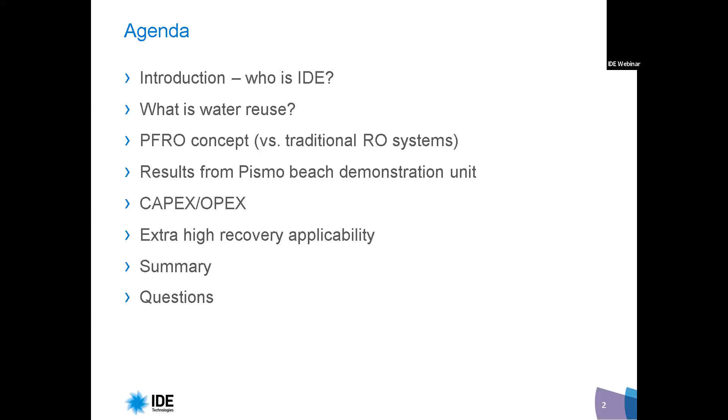So what's on the agenda? We'll start with a quick introduction about who is IDE, what is water reuse. We'll show the PFRO concept versus traditional RO systems. I'll share some results from the Pismo Beach demonstration unit, show some analysis of CapEx and OpEx, go quickly over the applicability of extra high recovery using PFRO, end up with a summary, and of course, we'll leave some time for questions.

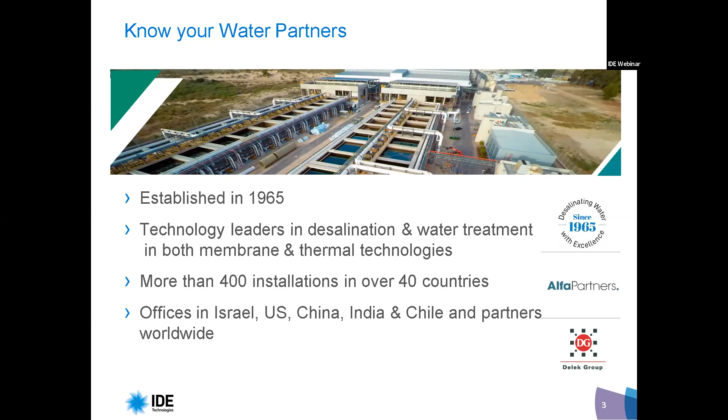A brief introduction about IDE, for those of you who are not familiar with us. IDE was established in 1965, more than 50 years ago. It's a technology leader in desalination and water treatment. Started with thermal technology, and as RO membrane technology started to get into the market, switched more to membrane-based technology. More than 400 installations worldwide, offices in Israel, US, China, India, and Chile, as well as partners worldwide.

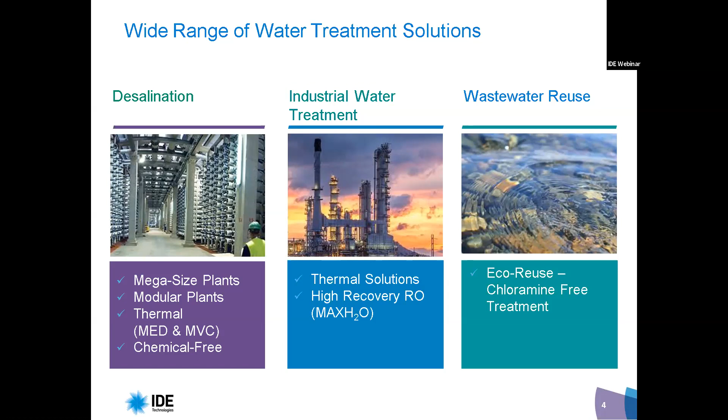IDE is focused on three main sectors: desalination, seawater and brackish, industrial water treatment, and wastewater reuse. It's worth mentioning that in the desalination sector, IDE built some of the biggest desalination plants in the world, including Sorek in Israel, Carlsbad in California, Jamnagar for Reliance in India, and Tianjin in China, which is the biggest thermal desalination plant in China, and many more.

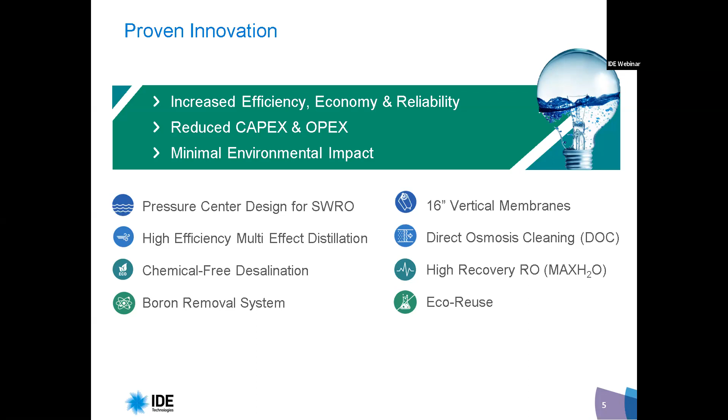IDE has a long tradition of innovation and puts a lot of emphasis on advancing the technology, as you will also see in this webinar about the PFRO technology. Some of the key innovations developed at IDE, among others, are pressure center design for seawater RO, 16-inch vertical pressure vessels like installed in Sorek, direct osmosis cleaning, and chemical-free desalination, also known as ProGreen, and many more.

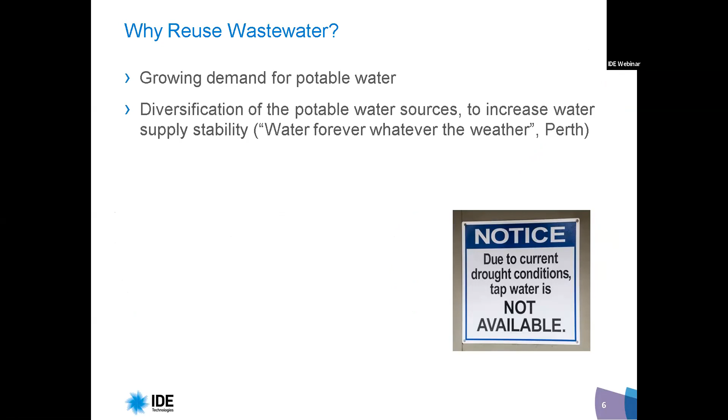I'll go quickly over a short description of the need, since I'm sure most of you already know about it. So why reuse wastewater? There is a growing demand for potable water. Another important feature is the diversification of potable water sources to increase water supply stability. As they say in Australia, in Perth, water forever, whatever the weather. I like that saying.

Since it's a low TDS water source, it enables low pressure RO operation, so it's a cost-effective process — you don't need to go to very high pressures. It's an abundant water source. It's a proven technology with a long reference list, and therefore not something very new, so you can feel quite confident when going to water reuse, and there are strict regulations, so the water is pretty much very, very safe.

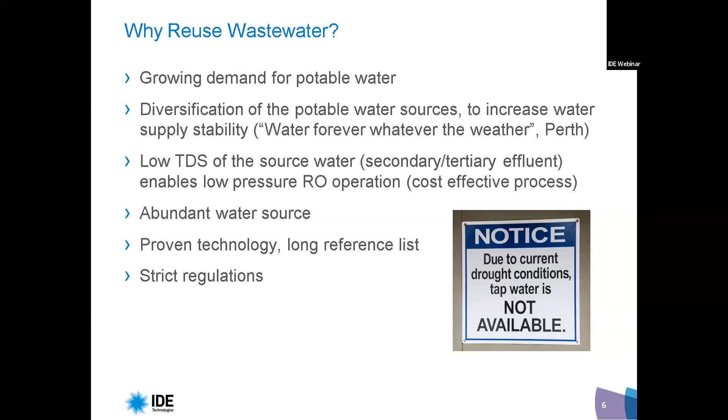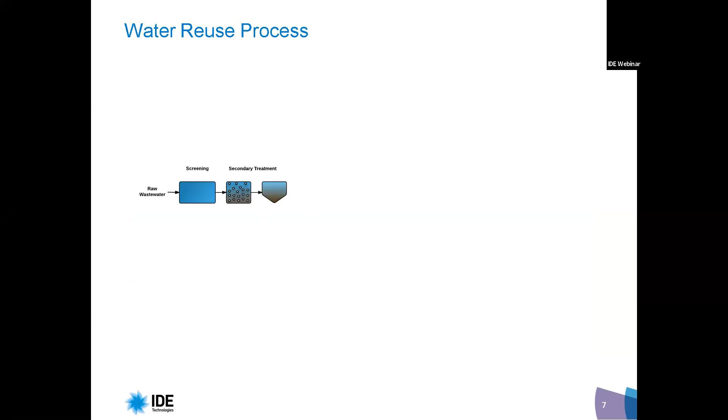So here is the water reuse process. We're starting with a wastewater treatment plant — in this case, an activated sludge process with a secondary effluent. The effluent flows to the advanced water treatment, basically the water reuse facility, typically including at least 3 stages: starting with microfiltration or ultrafiltration to remove suspended solids, then reverse osmosis, which does the actual desalination itself, removing ions as well as dissolved organic contaminants, and finally UV AOP — UV disinfection with advanced oxidation — aimed at taking care of any organic contaminants, residual pharmaceuticals, antibiotics, etc., through this high energy AOP process.

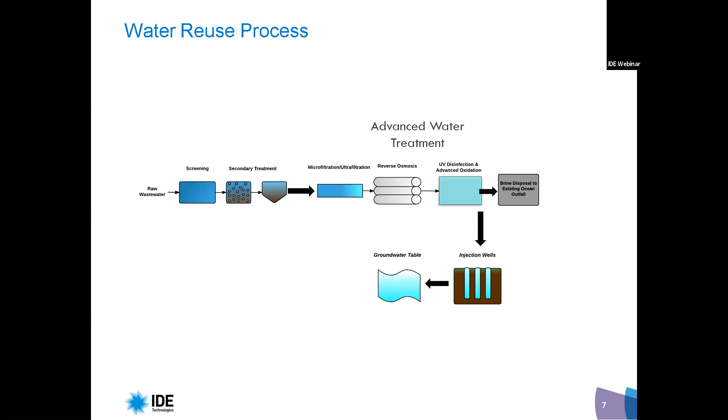The brine is usually disposed either to ocean outfall or whatever other source there is for the brine. And the permeate, if it is indirect potable reuse, which is basically all the cases, goes to either injection wells or other natural body sources. The water then gets mixed with natural water in the environment and ends up in the production wells where it is treated and supplied to the community. So this is the advanced water treatment, the water reuse facility.

Typically, chloramine is dosed to the UF and sometimes also to the RO to control biofouling. However, the usage of chloramine has some disadvantages. First, it creates disinfection byproducts. When hypochlorite is injected into the wastewater treatment plant's effluent to form chloramine, it also reacts with organic matter in the water and forms certain organic contaminants such as NDMA, haloacetic acids, and trihalomethane. All of these disinfection byproducts pose health risks and are not desirable, even though they're mostly degraded in the UV-AOP process, but still better off without them.

Chloramine dosage has to be managed well, because if it is overdosed or there is not enough ammonia in the water, it may form free chlorine, which may oxidize the membrane surface and damage it. So it adds complexity to the system. Another issue is that chloramine lowers the UVT value of the RO permeate and acts as a free radical scavenger, therefore reducing the efficiency of the UV-AOP process — I will talk about it later on. And of course, it also costs money, so it adds to operational expenses.

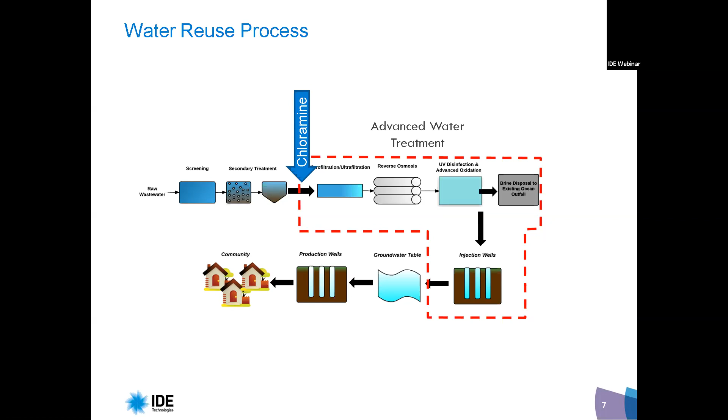One of the key disinfection byproducts is NDMA, a dangerous organic contaminant and suspected carcinogen. In California, it is limited to 10 nanograms per liter, as well as in other places. Our approach to avoid NDMA formation is to avoid chloramine dosage by controlling biofouling and using innovative preventive maintenance methods to keep the membrane surface clean. In other words, just avoid chloramine and keep the membrane clean using alternative methods.

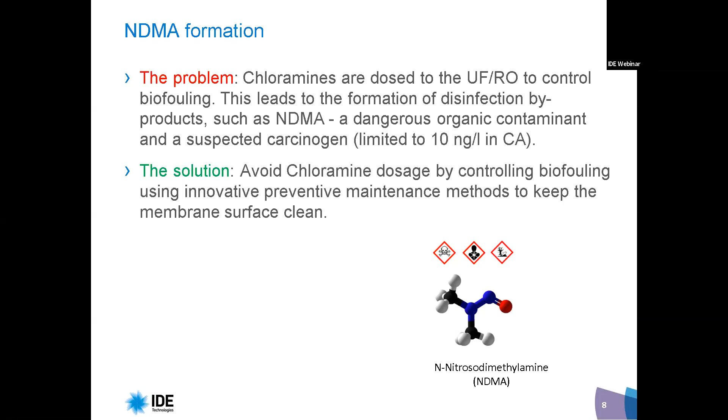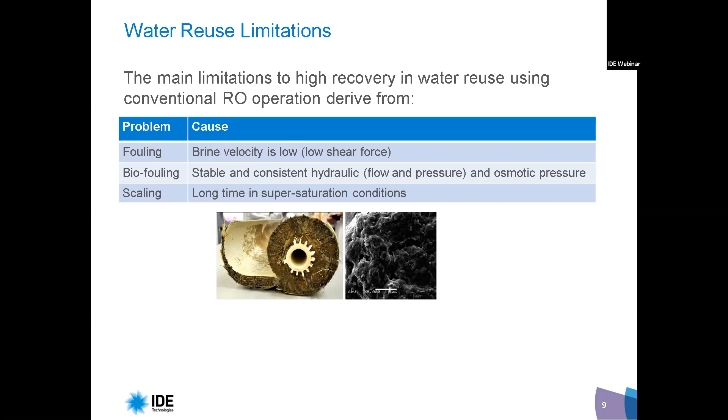The typical limitations to water reuse in general, especially if you want higher recovery, is fouling. It normally occurs because there is not enough brine velocity, resulting in low shear force applied on the membrane surface. Biofouling is always a concern in water reuse facilities, normally caused by stable and consistent hydraulic and osmotic conditions. Last is scaling, and the best conditions for scaling are operating for a long time in supersaturated, hydraulically stable conditions, which is pretty much what happens in standard RO facilities.

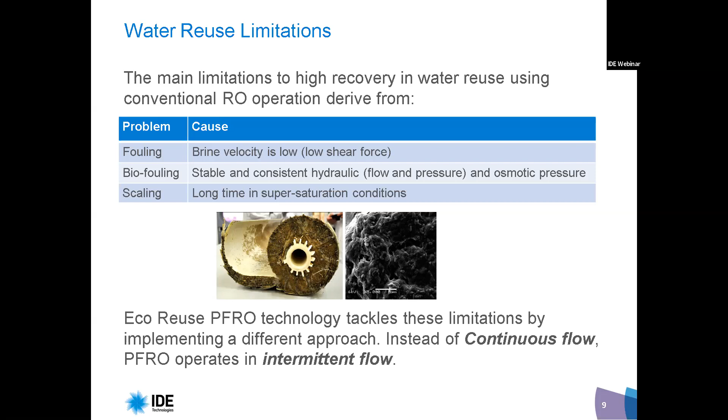The Eco-reuse PFRO technology tackles these limitations by implementing a different approach. Instead of having continuous flow, PFRO operates in intermittent flow, and I will go deeper into details right now.

A classic standard, also termed fully advanced treatment or FAT, is the standard RO facility, which operates at constant flows. In this case, you see a 3-stage water reuse facility, typically in the ratio of 2 to 1 from stage to stage. The reason to design this way is because you want to maintain a minimum brine flow to have enough shear force in the last membranes.

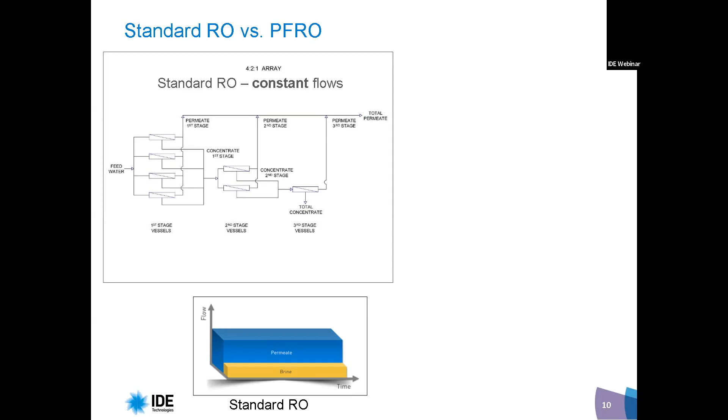In PFRO, there is a different approach: alternating flows. Therefore, there is no longer a need to maintain this ratio of 2 to 1. We can operate at a single stage. What we do in order to maintain enough shear force is operate in an alternating flow regime.

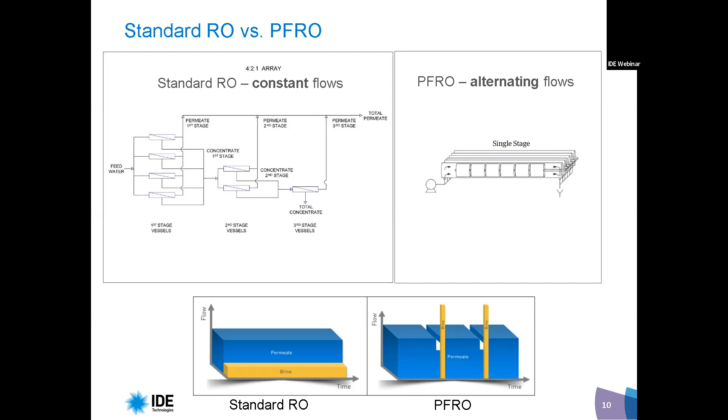Instead of having constant flows like in standard RO, in PFRO there is a brine valve, which you see here. This is the brine valve. It basically dictates the system's status: you can either be in production mode, also called filtration mode, or you can be in flushing mode.

Each bundle of pressure vessels, typically 6 pressure vessels, has a common brine valve that opens and closes. When the valve is closed, we are in production mode. It is dead-end filtration, and 100% of the feed water leaves as permeate. This is what you see right now. So when the brine valve is closed, all the water fed into the system leaves as permeate. As permeate leaves the system, salts accumulate on the feed side, so feed TDS increases and feed flow decreases proportionally.

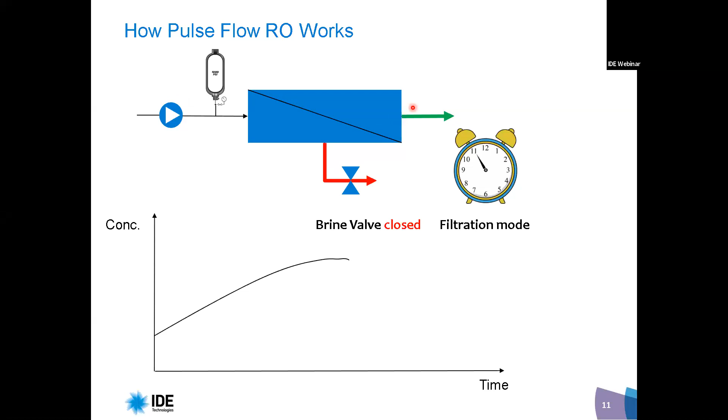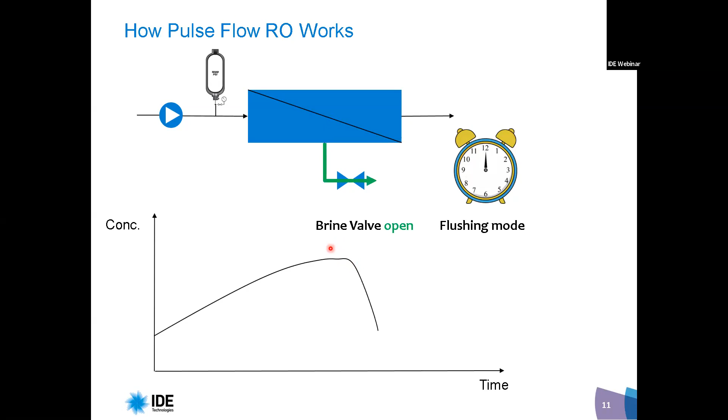Now we change mode and go into flushing mode. The brine valve opens, and the water left inside the pressure vessels, at least in the last few membranes, leaves via the brine pipe very fast, creating a high shear force. The concentration drops down because the high TDS water leaves the system, and new water is fed in the new cycle. When the brine valve opens, the saltiest water in the last few membranes leaves as brine at high velocity, creating high shear force. In the next cycle, fresh water enters the pressure vessels again and the TDS lowers. So there are ever-changing hydraulic and osmotic conditions in the pressure vessels.

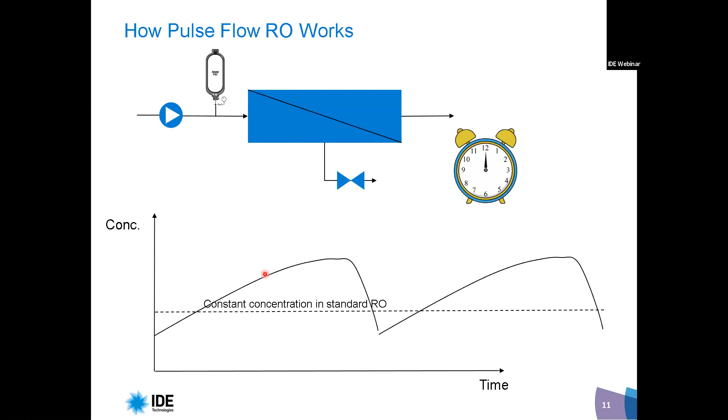What you see here in the graph is the concentration — you see that it fluctuates. Compared to standard RO, where there is constant concentration, in PFRO it always oscillates. Looking at the brine flow, once the brine valve is closed, there is no brine flow, but when it opens, there is a very high peak, reaching very high shear forces — about three to four times or even more than a typical RO.

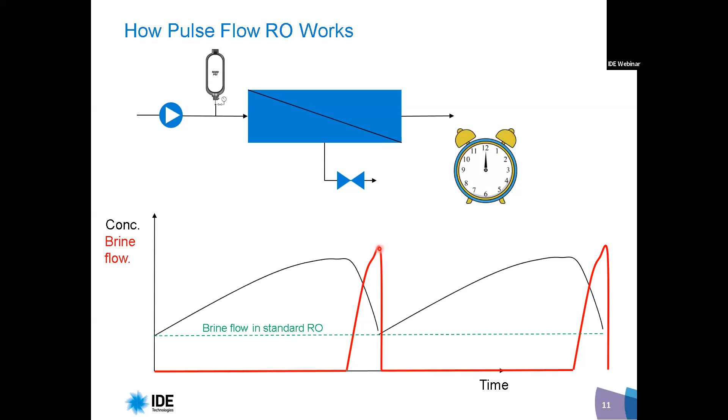So every now and then, there is a high shear force that removes particulate matter or biofouling from the membrane surface, and therefore keeps the membrane clean. Let's look at some real data graphs that show how PFRO works.

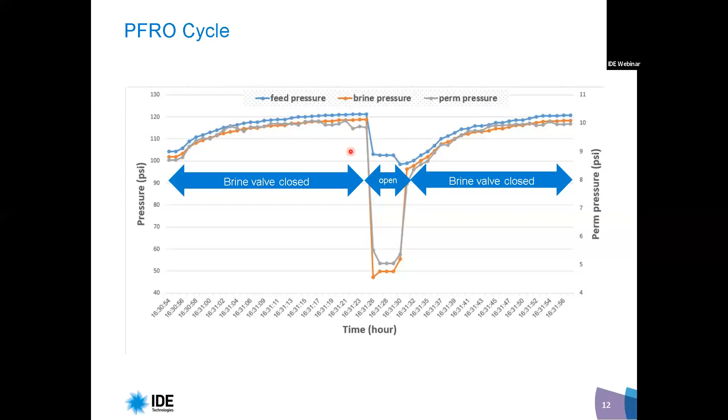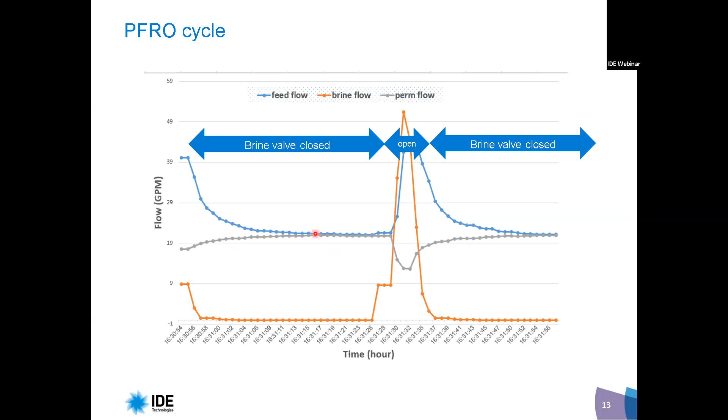Okay, let's go a little bit into the theory of scaling and how it occurs. So in order for a crystal to form, a few things need to happen. First of all, you need to operate long enough for the crystal to form. When a crystal forms, it goes through a stage called the nucleation process.

Usually it happens around some particle that is on the surface. And then after that happens, there is the crystal growth phase, which is usually the longest phase, and it is driven by diffusion. This time is called the induction time - the minimum time required for a crystal to form. Once we are past that induction time, the crystal starts to grow with its three-dimensional matrix.

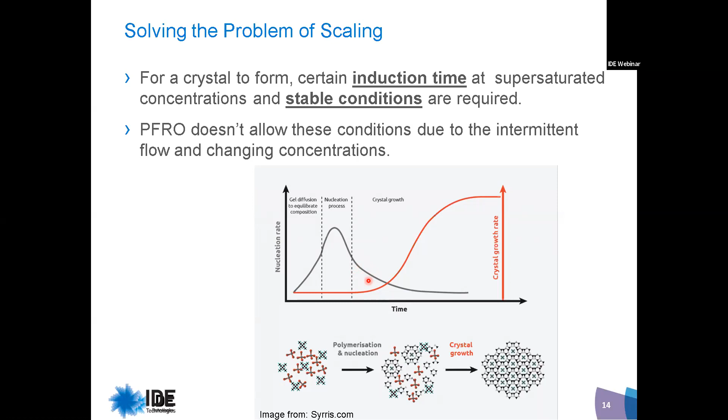And if you don't allow the crystal to get into this - if you don't allow enough time for the induction time to occur - you basically don't allow the crystal to form. This is what PFRO tries to do: it tries not to allow enough induction time for the crystal to form. The other important thing for crystal formation is to have stable conditions, both hydraulic and osmotic. So PFRO doesn't allow these stable conditions, due to the intermittent flow and ever-changing concentrations.

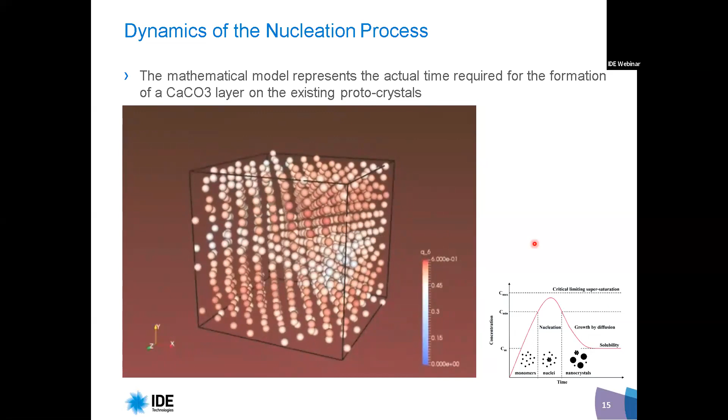Here you see all the atoms try to find the right place - minimal free energy. And there we go - you see that it is all stable now. So basically, if you don't allow this to happen, then you significantly reduce the chances of having scaling.

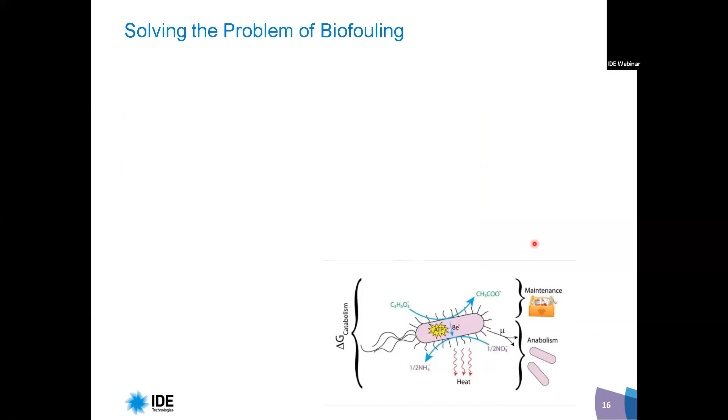So we talked about scaling. Now let's talk about biofouling. For a bacteria to grow and proliferate, what it basically does is gain energy by metabolizing biodegradable organic matter, like the residual organic matter that we have in the effluent.

And the best thing for a bacteria to do is to sit on the membrane surface, open its mouth, and enjoy the flux of nutrients. This is the best thing for bacteria to grow and form biofouling.

However, bacteria need to waste energy if they have to cope with ever-changing hydraulic and osmotic conditions. They need to produce certain metabolites in order to overcome these conditions. Basically, we tire the bacteria out by changing the hydraulic and osmotic conditions - exposing it to high shear force, ever-changing osmotic pressures, and so on. So it's a hard life being a bacteria in a PFRO process, and that's exactly what we want. There is not enough free energy left for the bacteria to multiply and reproduce.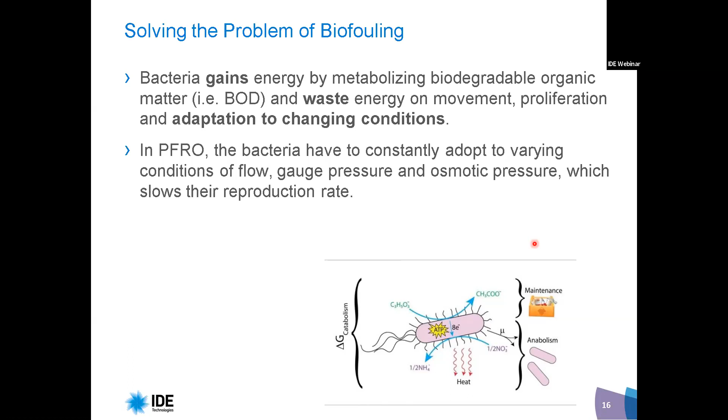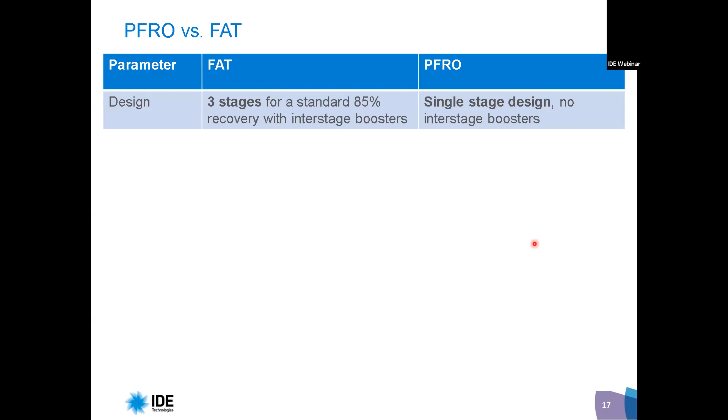So to summarize the differences between PFRO and the fully advanced or classic RO treatment: as for design, in fully advanced treatment design, if you want to reach 85% recovery, normally you need 3 stages using interstage boosters in between. In PFRO, it is a single stage design. There is no interstage boosters, therefore it is a whole lot simpler.

The mode of operation in the fully advanced treatment process is that we operate in fixed and continuous hydraulic and osmotic conditions, whereas in PFRO, there is all the time alternating conditions, both hydraulic and osmotic.

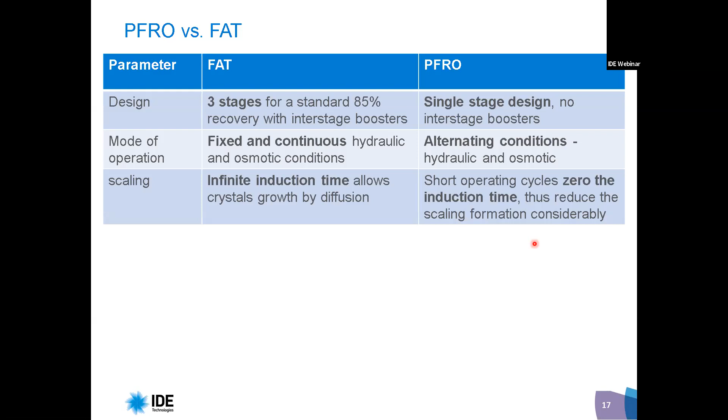For scaling, in fully advanced treatment, there is basically infinite induction time. It allows crystal growth by diffusion. Nothing is there to stop them, only CIPs. Whereas in PFRO, we do short operating cycles to zero the induction time. Therefore, we reduce the scaling formation considerably.

For biofouling, in fully advanced treatment, there is low shear force, stable conditions that allow bacterial proliferation, whereas in PFRO, there is high shear force and also rapid changes in environmental and hydraulic conditions that reduce biofouling.

If you look at the environmental aspects, the use of chloramine to manage or control biofouling creates disinfection byproducts, such as NDMA and others. Whereas in PFRO, we don't use chloramine, so there are no disinfection byproducts. So altogether, it's a safer water being produced.

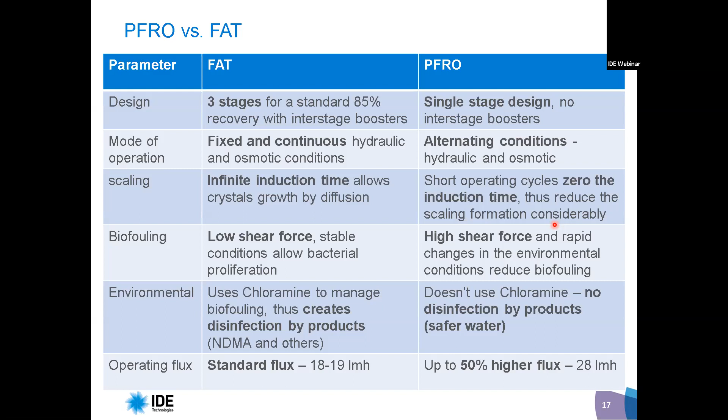Last but not least, a very important parameter for the CAPEX and OPEX is the operating flux. Typically in FAT, we operate at 18 to 19 LMH. If you want to translate that to GFD, it is about 11 GFD, whereas in PFRO, we can do up to 50% higher flux, about 28 LMH, or 16.5 GFD. So significantly higher.

Now let's go a little bit to the results from the actual demonstration facility that we operated at Pismo Beach. Pismo Beach is part of the Central Coast Blue, a regional groundwater augmentation and recycled water project that aims to protect shared groundwater while providing a sustainable local water supply for the 5 cities communities of Arroyo Grande, Pismo Beach, Grover Beach, and Oceano.

The idea behind this project was to increase the groundwater supplies for the area by more than 30%, reduce seawater intrusion, reduce ocean discharge, and increase the region's water supply resiliency. As part of this effort, a water reuse demonstration facility was built to serve as a public outreach facility and demonstrate new technologies, and IDE was lucky enough to be part of this project.

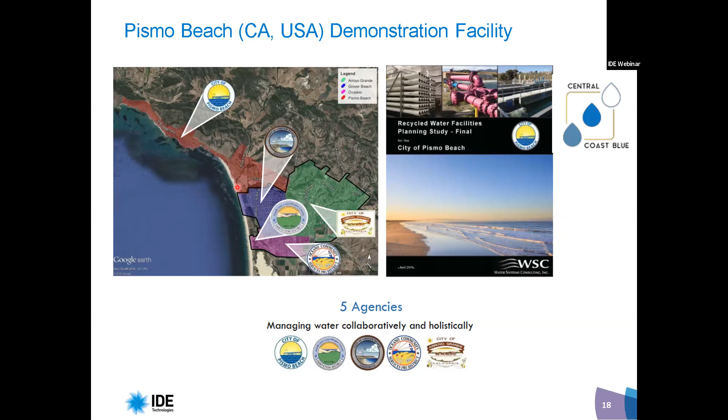So here you see this is Pismo Beach, pretty much in between Los Angeles and San Francisco, a beautiful area.

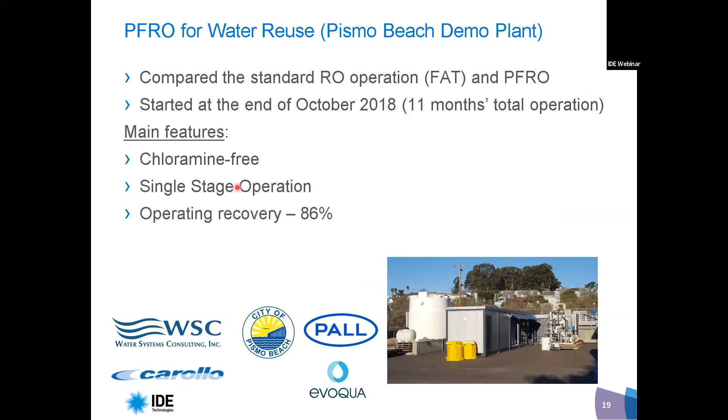So the demonstration facility itself was built in order to compare the standard RO operation and PFRO. It started at the end of October 2018, and operated in PFRO mode for about 11 months. The main features were that it operated chloramine-free in PFRO mode, in single-stage operation versus two-stage operation in FAT mode. Operating recovery was 86%, 50% higher flux than standard during PFRO operation, and no CIP was done throughout the whole time. This is very important.

And as I will show later, there's considerable CAPEX and OPEX savings. I'll take this opportunity to thank our partners: WSC for managing this project, Carollo for collecting data and analysis, the city of Pismo Beach for hosting us and helping on site, Pall for supplying the MF, and Evoqua for supplying the UV AOP.

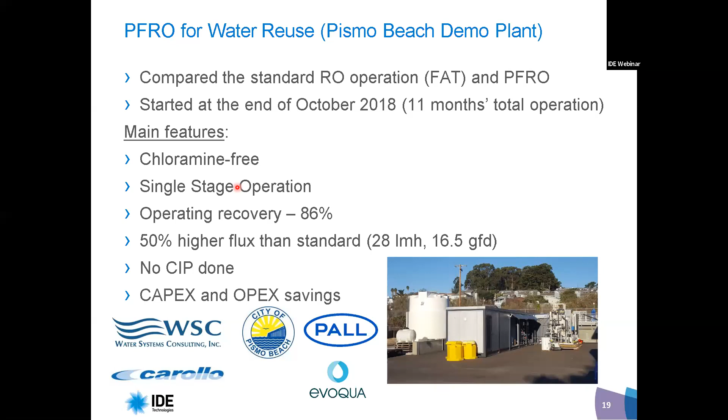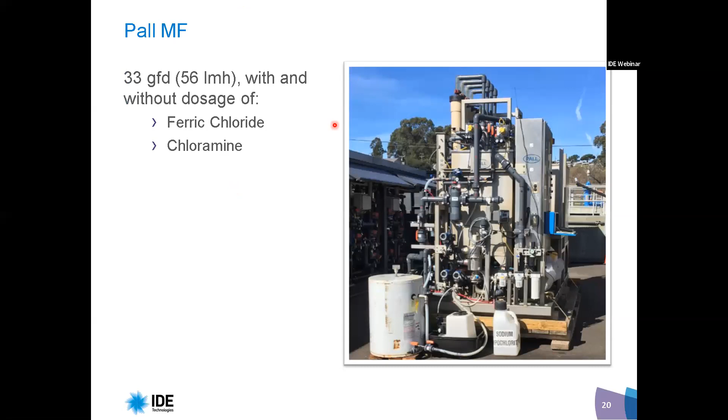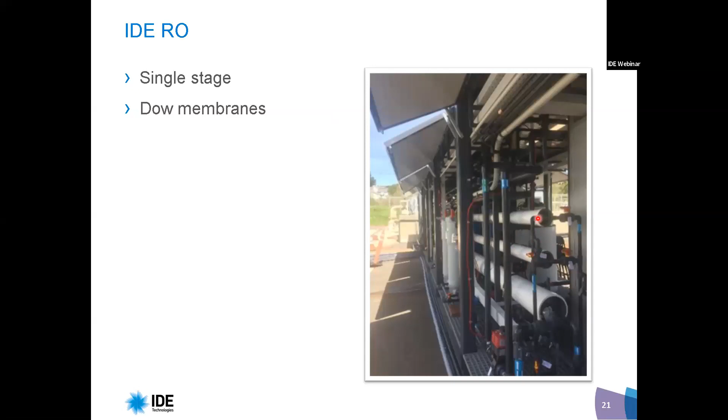Pall MF was operated at 33 GFD flux with and without the dosage of ferric chloride and chloramine. Chloramine, of course, was dosed when operated in FAT mode and was not dosed when operated in PFRO mode. The RO was using Dow's Eco Pro 400 membranes. In the picture here, you see the 8-inch pressure vessel. This was the first stage, and when operated in FAT mode, there were 2 pressure vessels of 4-inch each operated for the second stage. When operated in PFRO, those were not in use, and they were disconnected.

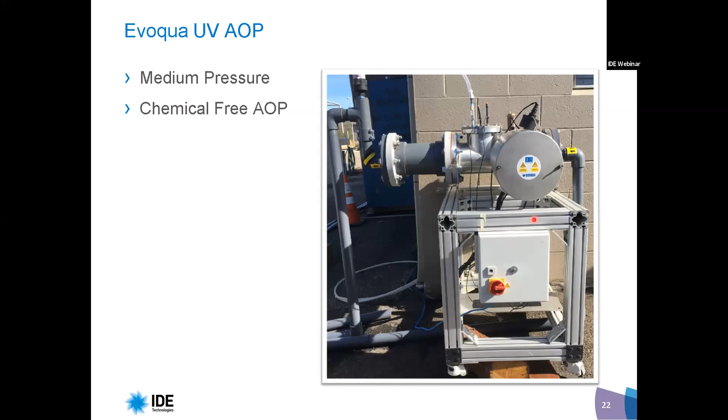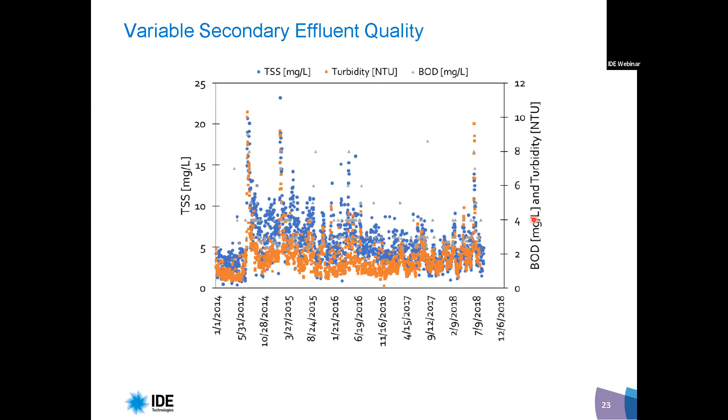And here you see the TSS and BOD of the effluent water. The feed water to our system was secondary effluent from the local wastewater treatment plant. It was activated sludge, including nitrification. TSS was about 5 ppm with some fluctuations up to 10 ppm, and BOD was normally between 2 to 5. So pretty normal effluent.

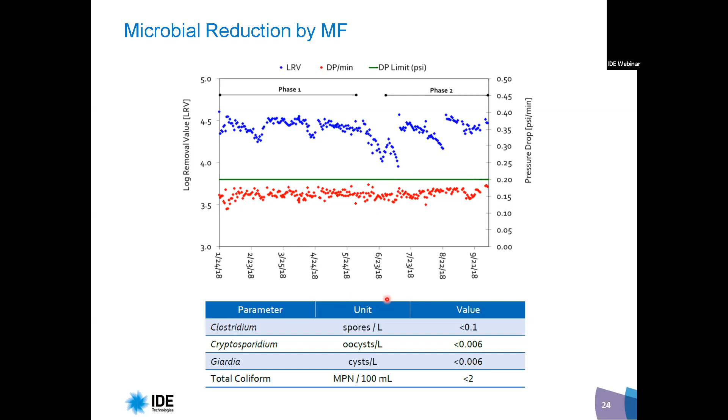Here you see the performance of the MF. The blue graph shows the log removal value by the MF, and the red graph shows the results of the pressure decay test, which was below the max value at all times, showing that the integrity of the MF was okay throughout. In addition, the pathogen concentration in the filtrate was good as expected. It removed everything perfectly.

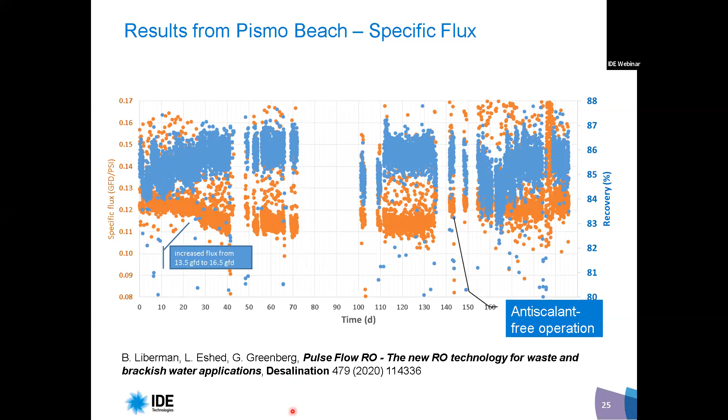If you compare this specific flux to that of other well-performing water reuse facilities, such as Orange County, the specific flux in Pismo Beach was around 0.12, whereas in Orange County it started around here and gradually decreased. Here is where they had to do a CIP. So altogether there is somewhere between 20-30% higher specific flux overall. And you need to consider that the operating flux in Orange County was normal, around 11 GFD, whereas in Pismo Beach it was significantly higher, at 16.5.

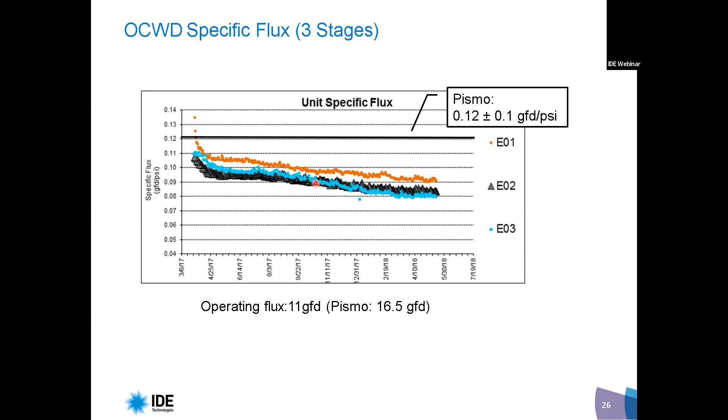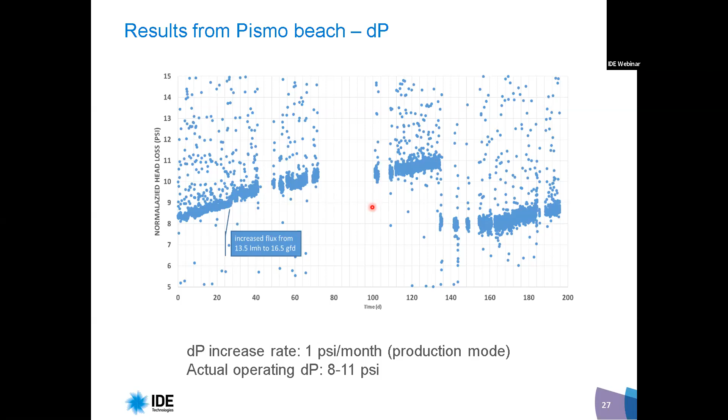If you look at normalized head loss, the rate of DP increase was around 1 PSI per month in production mode. Overall, the actual operating DP was around 8 to 11 PSI. Here we sent 2 membranes to autopsy, so the DP decreased, but altogether quite low values. If you compare that to Orange County, the DP was somewhere between 40 to 55 PSI across the 3 stages together, whereas in Pismo Beach it was again around 10 or so.

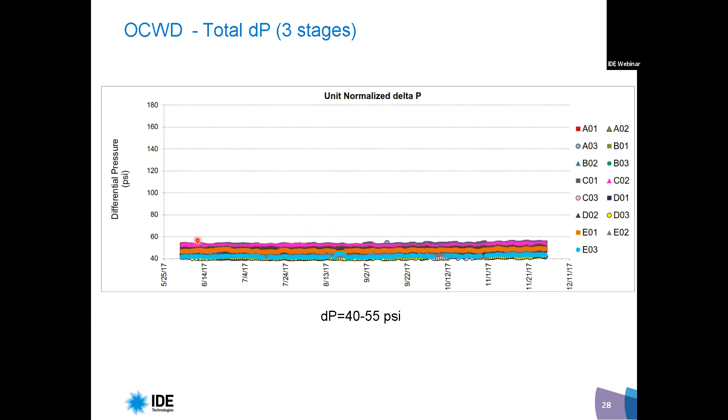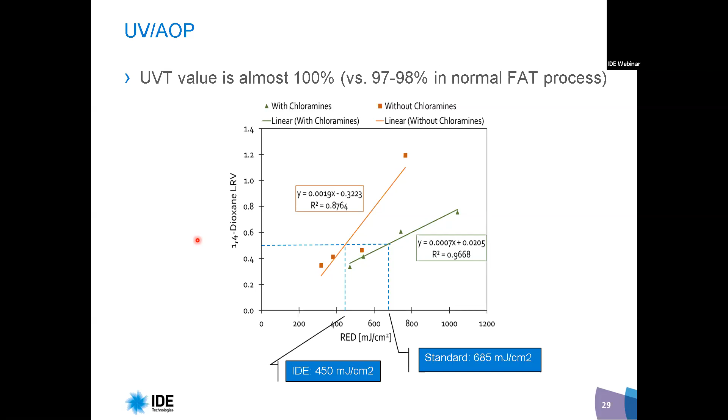One of the things I started to talk about was the UVT, which stands for UV transmittance - basically how transparent your permeate water is. This is important because the UVT has a great influence on the energy required by the UV AOP to reach the half-log removal of 1,4-dioxane as required by Title 22. When we operated in FAT mode, dosing chloramine, we saw that to reach this half-log of 1,4-dioxane it was required to dose around 685 millijoules per square centimeter, whereas in PFRO mode, when chloramine was not dosed, only 450 millijoules per square centimeter was used. So 35% energy savings on the UV AOP.

Moreover, in UV AOP systems you normally need to dose chemicals such as hydrogen peroxide or chlorine. And of course, with lower UVT, if you dose chloramine you will need more chemicals dosed. So significant OPEX savings here.

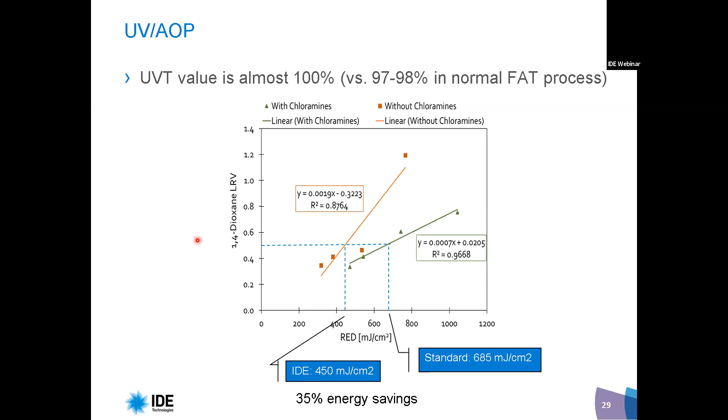When we looked at the permeate quality, we see a whole lot of pathogens in the secondary effluent, and in the RO permeate everything was pretty much removed. So again, as expected, the log removal value was as expected.

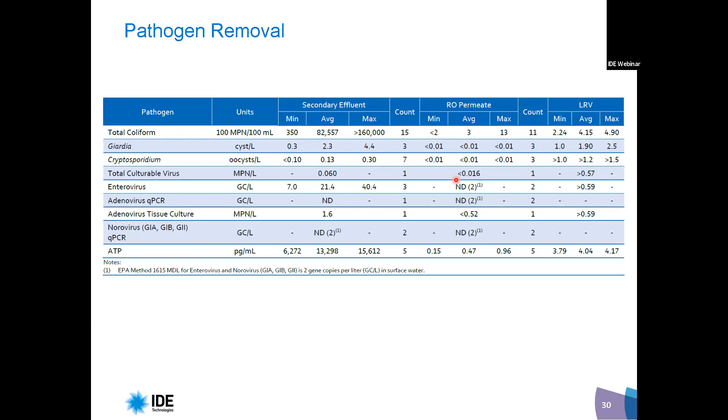When we looked at organic contaminants, out of 30 contaminants of emerging concern that we tested in the secondary effluent, 25 could be found there. Only one of them could be detected in the finished water, and that was sucralose, an artificial sugar used in Coke, etc. Sucralose was around 65,000 nanograms per liter in the feed, and only 28 nanograms per liter in the permeate - so 3 log removal in the RO, even better than the 2 log removal usually granted according to Title 22.

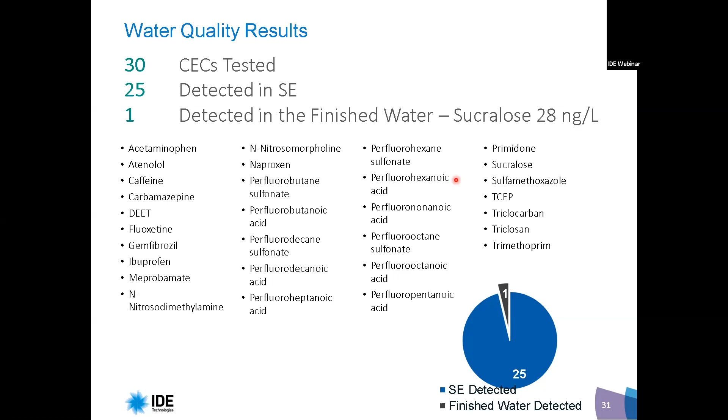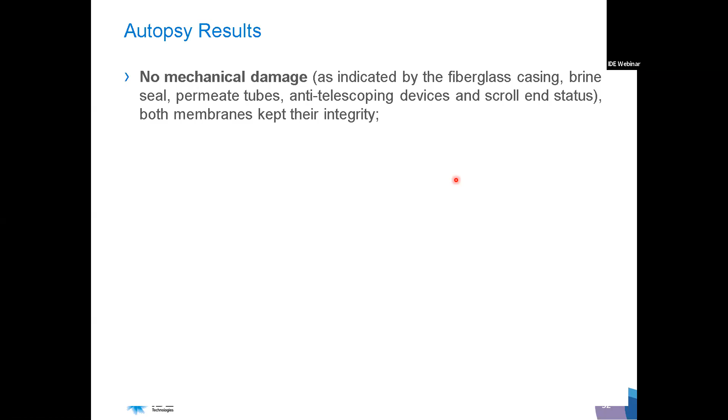As I said earlier, we sent a couple of membranes to autopsy, the first and last elements. This was important because some people were concerned that due to the oscillating hydraulic conditions in the system, there might be some mechanical damage. So it was very important to see the actual results after almost 11 months of operation. No mechanical damage was found, as indicated by the fiberglass casing, brine seal, permeate tubes, ATDs, etc. Both membranes kept their integrity. There was very little fouling or scaling presence, as indicated by the membrane's weight - it was almost like new membranes. Also, the foulant density was very minimal as well.

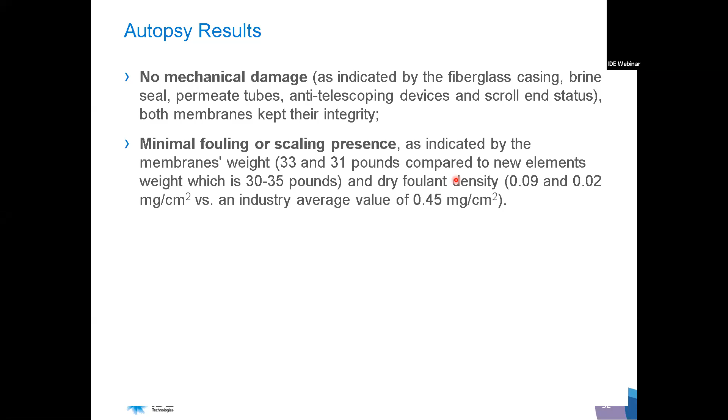Permeability loss was also, whatever permeability loss was there, it was fully recovered when CIP was done. And also when you look at the pictures of the spacer and the membrane itself, you see that it is very clean. So the PFRO was found to be very effective in keeping the membranes clean.

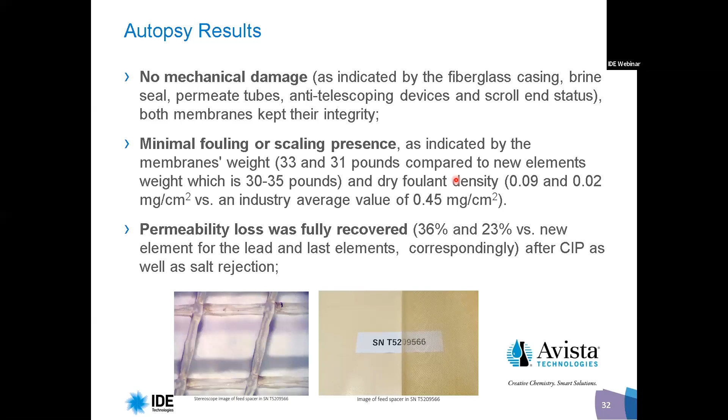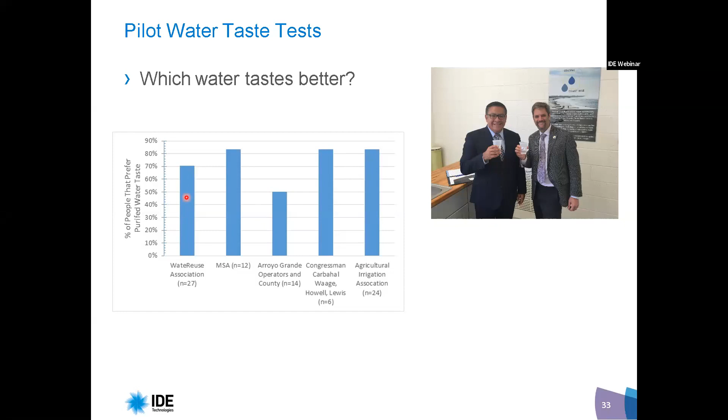Pismo Beach was not only a demonstration site, it also was a public outreach facility, and people came over, students, decision makers, etc. One of the things that was done there was water tasting, and it showed that 70% of the people preferred the purified water over tap water. So we're happy with that.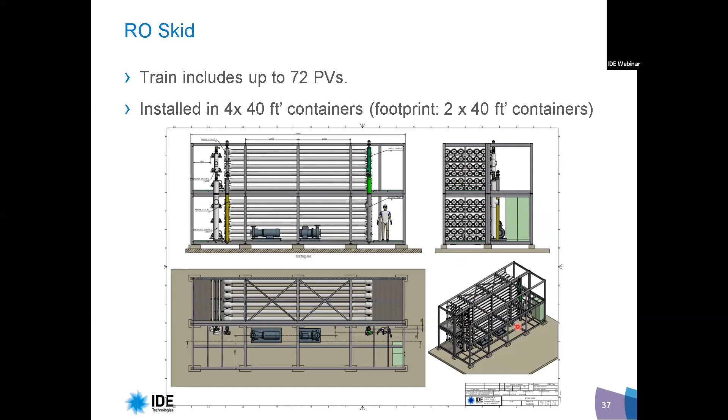If we look at this model and compare the OPEX, including all manpower and other costs, to the fully advanced treatment, you see here the specific cost in US dollars per cubic meter. Since the PFRO operates at higher flux, we can produce more water from the same equipment and manpower. So altogether there is considerable savings here.

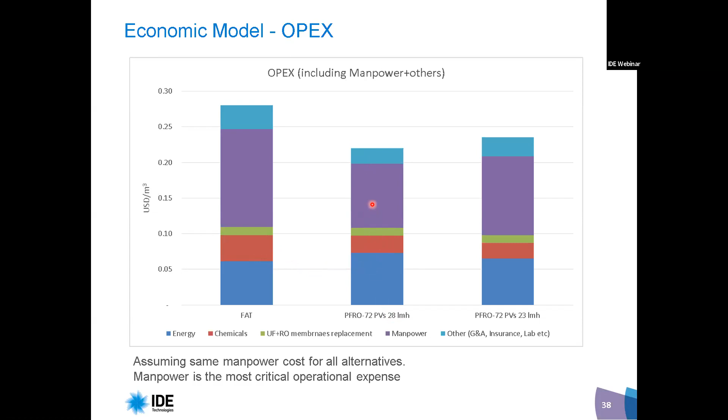You see that the energy, if you operate at higher flux, in this case a PFRO with 72 pressure vessels operating at 28 LMH or 16.5 GFD, the energy expenses are higher than FAT because you operate at significantly higher flux. But there are savings on chemicals because there is no chloramine dosed and fewer CIPs, etc. Since the same manpower operates the single train, you can produce more water from the same OPEX investment. So considerable savings here.

Also, when you look at CAPEX and compare that to the fully advanced treatment, since you produce more water, operating at 28 LMH or 16.5 GFD you can produce around 30% or more water from the same equipment. Then you have considerable savings on the CAPEX side, about 20-25%, depending on the exact case.

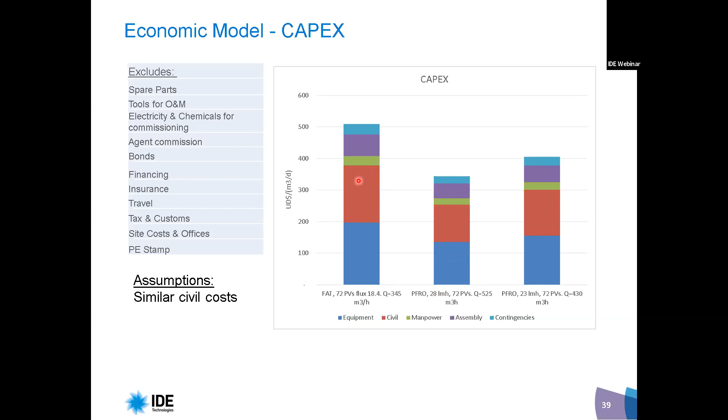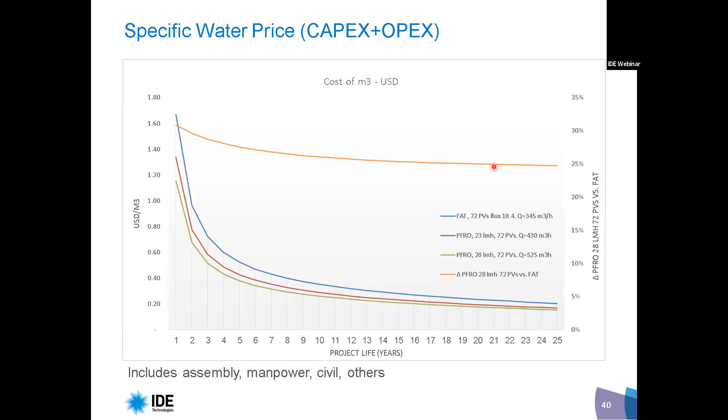If you look at overall project life in years, as time passes the importance of OPEX becomes more relevant than CAPEX. This graph, the orange graph, shows a comparison between the fully advanced treatment and PFRO operating at 28 LMH, 16.5 GFD. You see that if you look at 20 or 25 years of project life, you end up with savings of overall CAPEX and OPEX, or water cost, of about 25%.

In the next slides, I will show an exact case study in which we looked at trains from the San Diego Pure project and compared that to a what-if analysis: if this project was to use PFRO, what would be happening? In order to produce the capacity of water required for San Diego Pure, they required around 40 MGD, needing 8 trains of 175 pressure vessels each, including interstage boosters, etc.

If it was to be done using similar trains with the same amount of pressure vessels in each train, only 5 trains would be required. The reason is because we could use more elements, at least 7 elements per pressure vessel, since we don't have to worry about shear force anymore. The shear force is basically taken care of when we open and close the brine valve. And since we operate at higher flux, only 5 trains could supply the same amount of water. So in the fully advanced treatment, the classic approach, 8 trains had to be used, whereas in PFRO only 5 similar trains could be used. So not only do you save on CAPEX, you also save on footprint and all those other fixed costs.

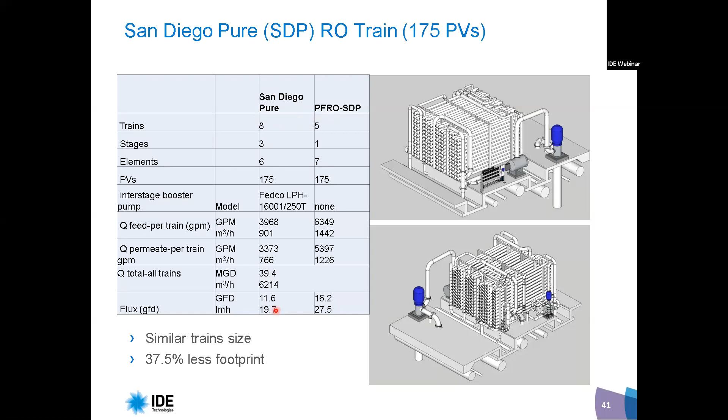So if you look at the water cost, CAPEX and OPEX of San Diego Pure, you see that after 20 or 25 years, you would be saving about 20% of the water cost.

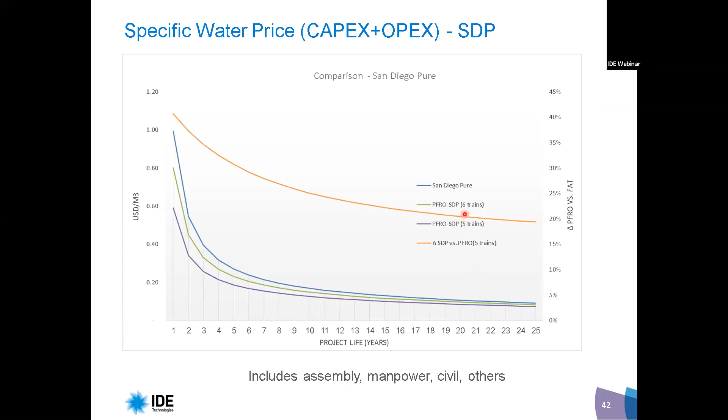Now, one of the most interesting things we see happening at the moment is that clients are looking for ultra-high recovery. When I'm talking about ultra-high recovery, I mean 90, 95%, sometimes even more. This is especially relevant for water reuse facilities located far from the shore, or that don't have easy access to brine lines, where brine disposal is an issue. Those facilities would like to get the highest recovery basically available.

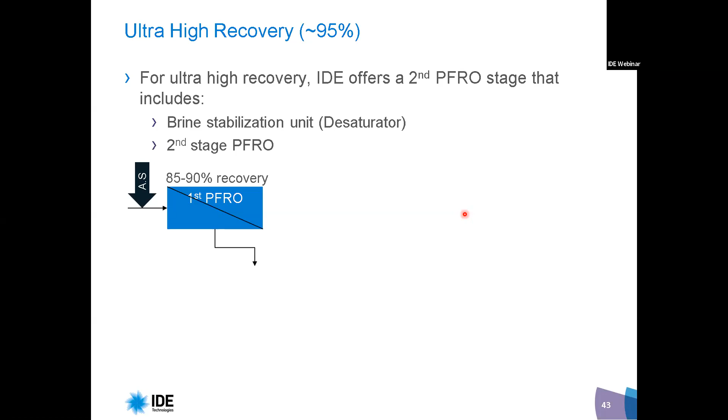So for this case, what we offer is to operate the first stage using PFRO, operating at 85 to 90% recovery with or without antiscalant as required, and then take this brine through a unit we term a desaturator. This unit basically takes the brine water, inactivates the antiscalants, and allows sparingly soluble salts to precipitate, which are later removed as sludge. Those could be calcium carbonate, silica, calcium phosphate, and other scaling-causing salts according to the actual water chemistry.

Then the water that is left after this goes through a UF in order to remove TSS, and then to another stage of PFRO, again with anti-scalant being dosed. So all this allows us to reach 95% recovery or even higher. Theoretically, you could also do this for more than two stages - you can even go to three stages and more.

And not less important is that the brine you release after all this is chemically stable. So this brine doesn't have any tendency to scale down the road. We basically don't transfer the scaling issue down the road to the pipe or to other accepting bodies of the brine.

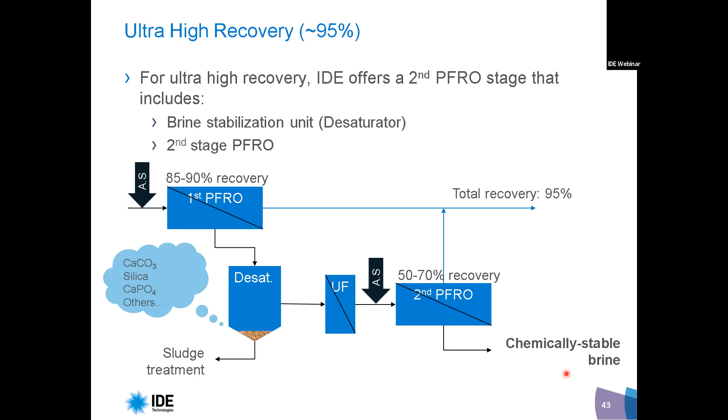So we are pretty much at the end of this webinar. Let's summarize what we've learned. On CAPEX: since it's a single stage design, and most importantly a higher flux design up to 50%, there are considerable CAPEX savings here.

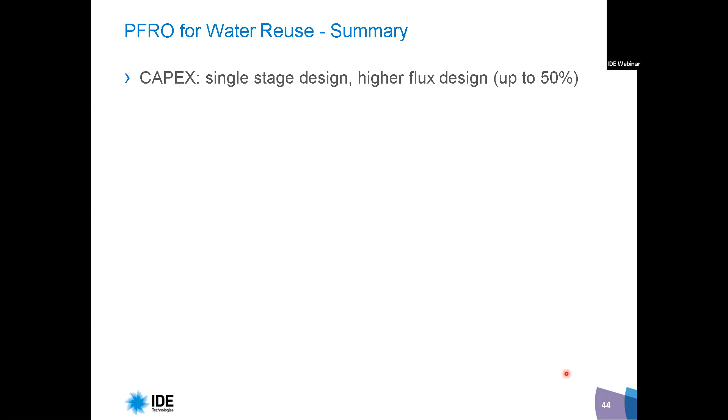On the OPEX side, there is no chloramine dosage. There are savings on fixed costs such as manpower and civil works. Again, you produce more from the same equipment, from the same fixed operational costs that you have. Overall water price is reduced by up to 25%. You can reach high or even very high recovery depending on the need.

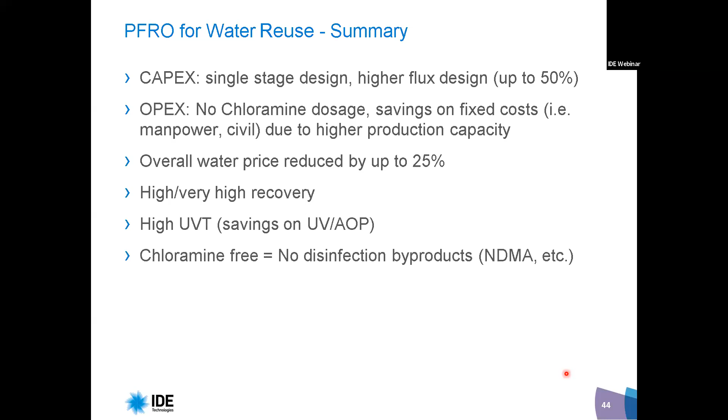You get a very high UVT, almost 100%, because you don't use chloramine. So you get savings on the UV AOP, a smaller UV AOP facility. Since it's a chloramine-free process, there are no disinfection byproducts - no NDMA, haloacetic acids, etc. So it's safer water, and it's an environmentally friendly process because you use less chemicals.

One thing to add before we go to the questions, more of a general note: I presented here about the usage of PFRO for water reuse applications, but this technology is a platform also offered for other applications, such as brackish water RO and industrial water treatment. So basically the same benefits apply there as well.

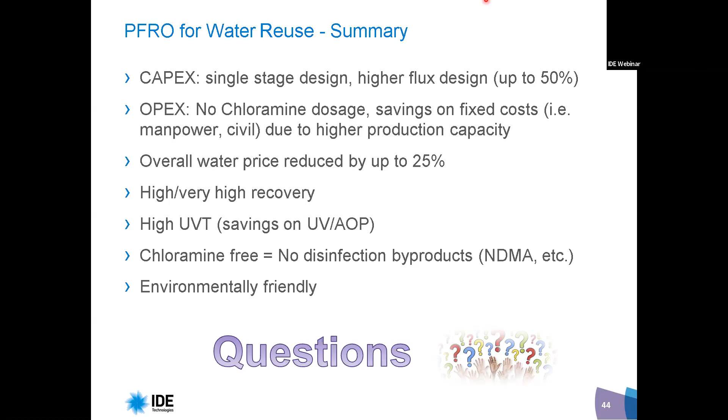So I see there is a question here, but apparently I cannot see it. Oh, here: Would this technology have any application in land-based brackish water desalination?

So definitely yes, this same technology can be used for BWRO. In fact, we already did some designs for it. Yes, the same benefits will also be relevant there. Of course, in brackish water there is normally less issue of organics, but there is always the issue of scaling, and those places can also enjoy those benefits.

Another question here: does the improved efficiency of PFRO allow for higher TDS inflow to desalinate oil field produced water? So basically, this is a standard RO operation when we talk about higher TDS. Again, if the issue here is scaling, then yes, PFRO will give you a benefit. Typically, if we go to higher TDS, as I presented one slide earlier, if there are any issues of scaling, we can do several stages of PFRO. In each stage we remove part of the sparingly soluble salts, so we can end up - theoretically, with the osmotic pressure limitation - up to around 8% TDS. So yes, this can also be done for IWT and also for produced oil water.